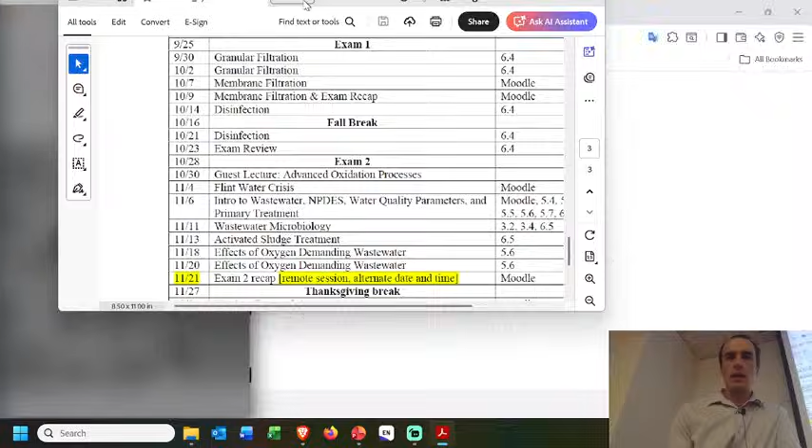So here's the attendance. I wanted to remind everybody the exam time. Location will be here like normal. Exam will be on Wednesday. Okay, I'm recording that just in case we have some stream issues. Like I mentioned, we're going to do a partially cumulative exam.

As I was thinking about it, in beginning to prepare the exam, I realized that I don't really want to do the multiple choice true or false as the cumulative. I'll keep that portion strictly on the recent stuff. So in terms of solving problems, it's about 50% cumulative. In terms of knowing more topical things about, let's say, wastewater regulation, that part will be strictly on wastewater: regulation, treatment goals, BOD testing, removal modeling, nutrient removal. Those topics will be the true-false multiple choice, 100%.

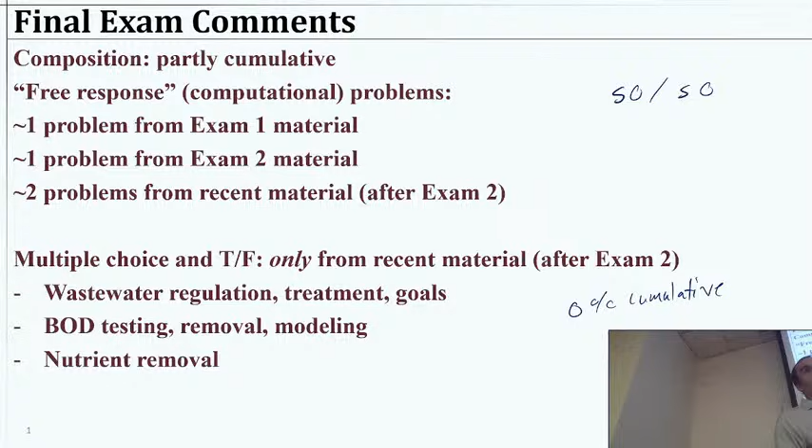And the remainder of the exam, which is probably 70 to 80% of the exam, will be 50%. So the free response problems, this is 50-50. And this part will be 100% not cumulative. So 0% cumulative. We'll say it that way. If that makes sense. I don't know if that's the right way to say it. A wastewater problem, because we also use sedimentation for wastewater. So maybe I would mix it up a little bit, but this is what you can expect in terms of

topics, the breakdown: 25% from the first exam, 25% from the second exam. And you'll find the nature of the course, it is quite cumulative. You've been doing mass balances from day one, and they're still relevant, right? Okay, so that's what you can expect. I don't have it quite finalized, but getting there. Any questions on that? All right. So we will get going with the homework solutions then. And as soon as we're done with that, if there are no other questions, we'll have you on your way.

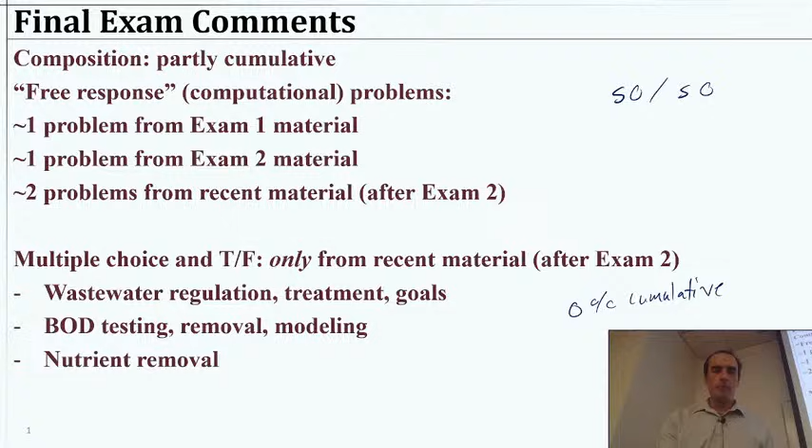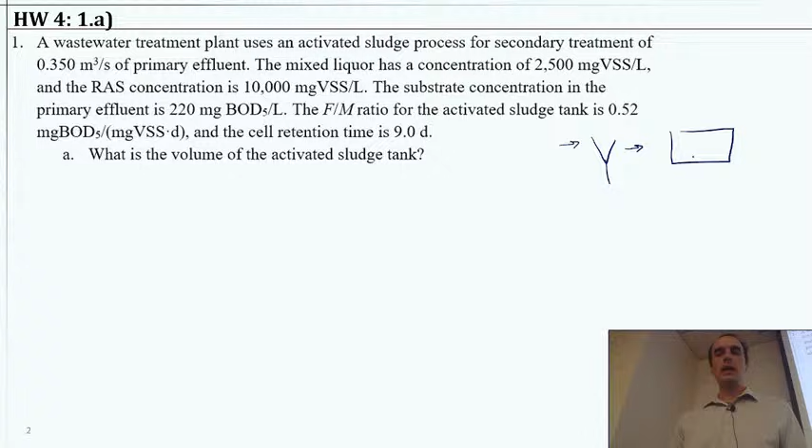So problem one, we have a wastewater treatment plant using activated sludge for secondary treatment, and we're given a flow rate of 0.35 cubic meters per second, primary effluent. So it might be good to go ahead and draw that up. Primary effluent would be what's leaving the first clarifier, the primary sedimentation, going into our activated sludge basin. Normally this will go into a second clarifier, and we might have recycle. But I'm going to just leave it right there for a moment and say that we have this flow rate leaving this guy, maybe an effluent from the primary. That is 0.35 cubic meters per second.

Okay, then we have the mixed liquor suspended solids concentration is 2,500 milligrams per liter VSS. That is going to be the X concentration within the reactor. It's going to be the mass concentration of bacteria in there. Then we have an RAS concentration. That would be our return activated sludge. That means we do have recycle. The XR here, go ahead and label that. So the X was 2,500 milligrams per liter VSS.

Okay, then we have the substrate concentration. Again, this is mentioning the primary effluent. So keep track, and this is what I like to do with drawing it, is keep track of what pieces are going where so we understand what we're talking about. So primary effluent, this is the primary treatment. The effluent to that is what's leaving it. So we have an S here, we'll call it S naught. That is 220 milligrams BOD per liter.

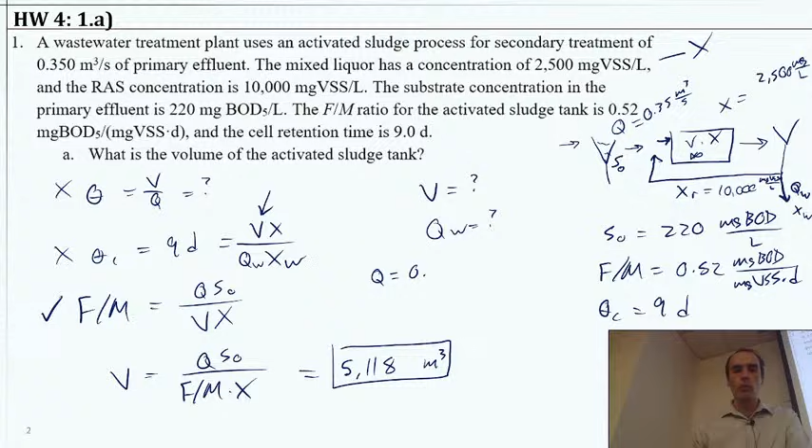Will you convert the Q into meters cubed per day? Yes. And I'm not sure if actually I did. I had that written on my notes, so I didn't find the answer, but we would say Q was 0.35 cubic meters per second. Of course, we have to count exactly like you said to convert it to days. So that would be 86,400 seconds in a day.

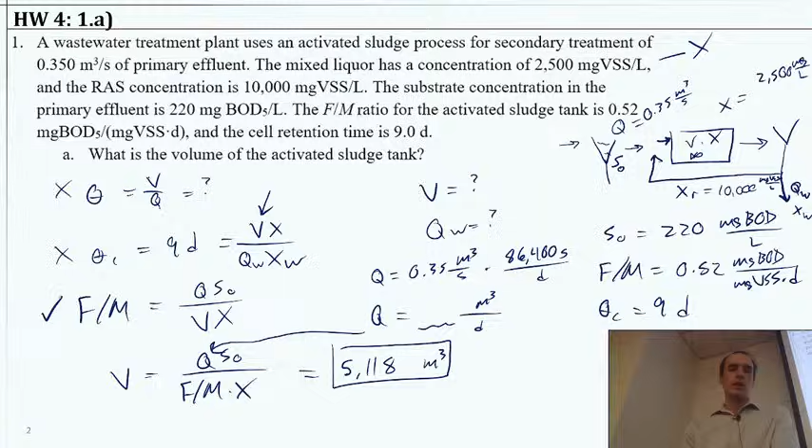Okay, so part B asks what is the waste activated sludge flow rate? So how much are we wasting per time? Here's where we need our QW. And if we flip back a second, we kind of wrote down all the possible equations we might want to use. And theta C would make use of that, but we needed volume, right? We didn't know QW, but now we can solve it because we have the volume. So we can rewrite that equation. Theta C is Vx over QW XW. We recognize that we can simply swap the QW with the theta C.

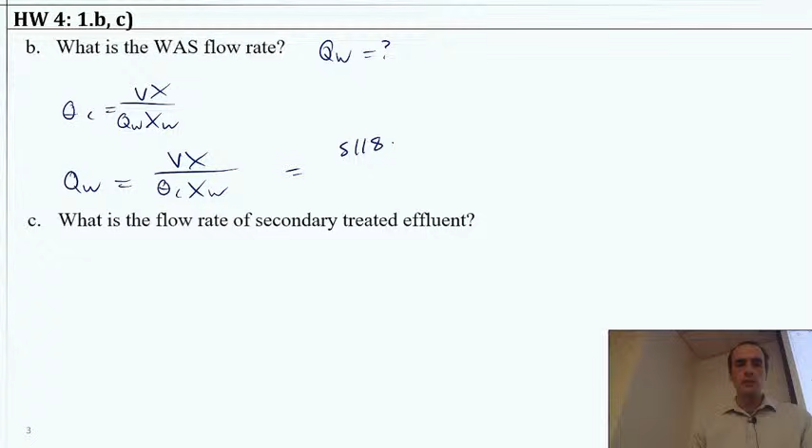And again, we need the theta in days, so that QW will be in days. When we put in the numbers here, this should become that 5,118 cubic meters, times the X, which was given at 2,500 milligrams VSS per liter. All this divided by the 9 days times our XW, which is equal to the XR. That was also given at 10,000 milligrams VSS per liter. Okay, putting all that in, this should give us a QW of 142.2 cubic meters per day.

Okay, so pretty straightforward there, as long as we have our units set up correctly. Part C asks, what is the flow rate of the secondary treated effluent? So again, we might want to be looking at our overall system design, where we have our reactor, our recycle, the QW is here, and we could say this is the Q effluent. And here, all we need to do is a balance on the Q, because we have Q effluent from the primary coming in. That was given.

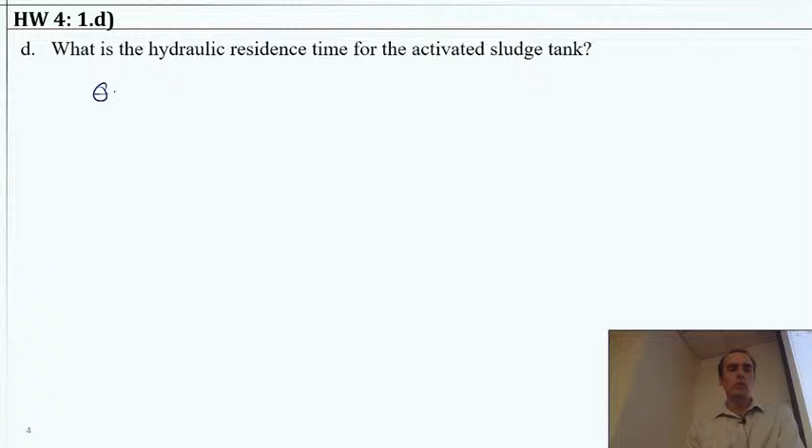Part D asks, what is the hydraulic residence time? This will simply be V over Q now that we have the volume and we know the flow rate. But again, the important thing is to take a look at our control volume. We make an important assumption in this type of problem that none of the volume of our clarifier matters for the reaction. So we're not bubbling air through it. The water's not staying there for a terribly long time. And so we make an assumption that the volume there doesn't matter, doesn't add to our system, and therefore we can draw our control boundary beyond it and ignore the recycling flow rate.

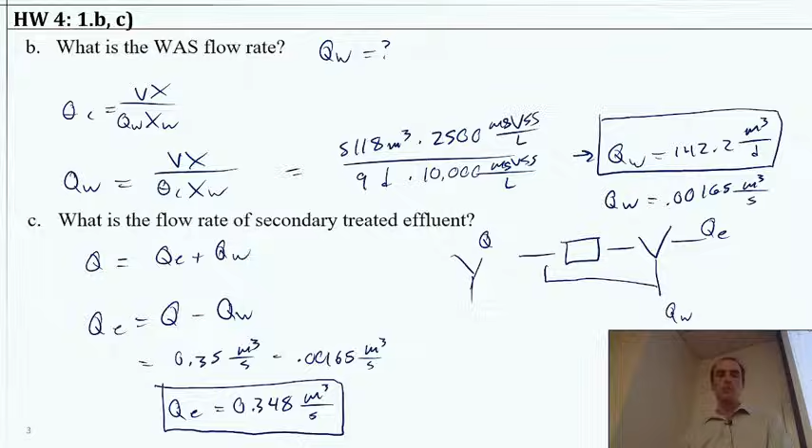So the total flow that's going through the reactor that does biological treatment is the Q that's coming across this control boundary. Okay? So that's going to be our Q, and the only volume that's important is going to be the volume in that tank. So this would then just be the 5,118 cubic meters divided by our 0.35 cubic meters per second. That's 14,000 seconds and some more, or 0.169 days. Good on that.

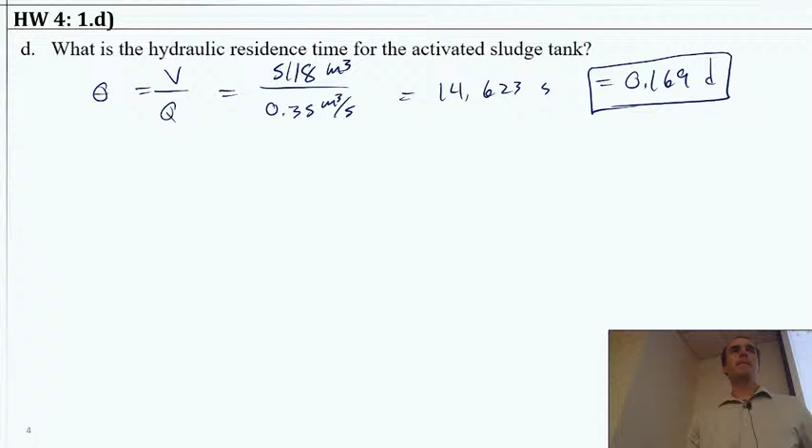All right, problem 2. We have some incoming wastewater with a BOD equal to 200 milligrams per liter. It's treated in a well-run secondary treatment plant that removes 90% of the BOD. You are tasked to run a 5-day BOD test with a standard 300 milliliter bottle using a mixture of treated sewage and dilution water, no seed, because not needed. And we're going to assume the initial DO is 9.2 milligrams per liter. So part A says, roughly what maximum volume of treated wastewater should be put in the bottle if you want to have at least 2 milligrams per liter of dissolved oxygen at the end of the test? You're filling the rest of the bottle with the water. You're filling it completely, and you need some amount of wastewater in it, right? So what's the maximum volume of treated wastewater that you would put in it?

Now the trick here, or the thing to note here, is treated is highlighted. So it has already passed through the treatment, and we know something about that treatment, right? It removes 90% of the BOD. So the initial is 200 milligrams per liter of BOD. That means the S in the effluent, or the treated, should be 10% of that, right? So this should be 20 milligrams per liter of BOD. That means what we're putting in our bottle is 20.

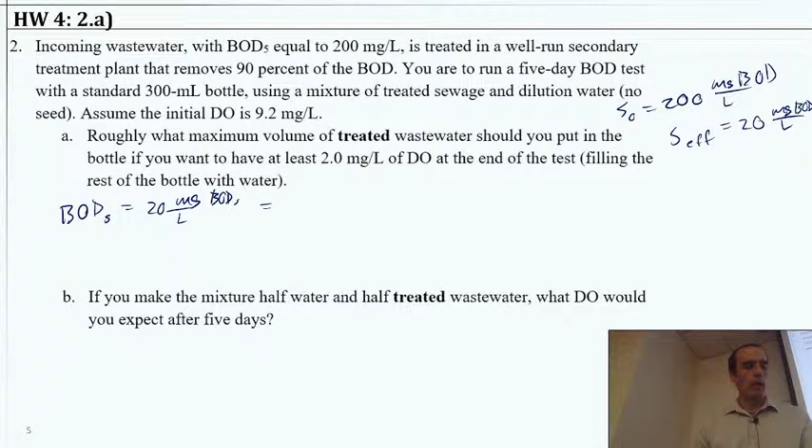So when we set up our BOD equation, we would say that is 20 milligrams per liter. And we can say that's going to be equal to the dissolved oxygen initial minus the final divided by the dilution coefficient. And the dilution coefficient is where we're going to find the answer, right? Because that is the volume of the wastewater divided by the total, which is 300 milliliters. Okay, so that's our problem set up. Now we just need to put in the different pieces and solve for that volume of the wastewater. In fact, I'm going to go ahead and multiply both sides by the P here. So we get volume of the wastewater that we want to solve for divided by 300 milliliters. I'll go ahead and leave the 20 milligrams per liter here for a moment.

And that's going to be equal to the dissolved oxygen initial, which was given as 9.2 milligrams per liter, minus the final amount that we needed, which was 2 milligrams per liter at the minimum. So now we have our system. All we have to do is take that on the right side, that'll become 7.2. Divide that by 20, multiply it by 300.

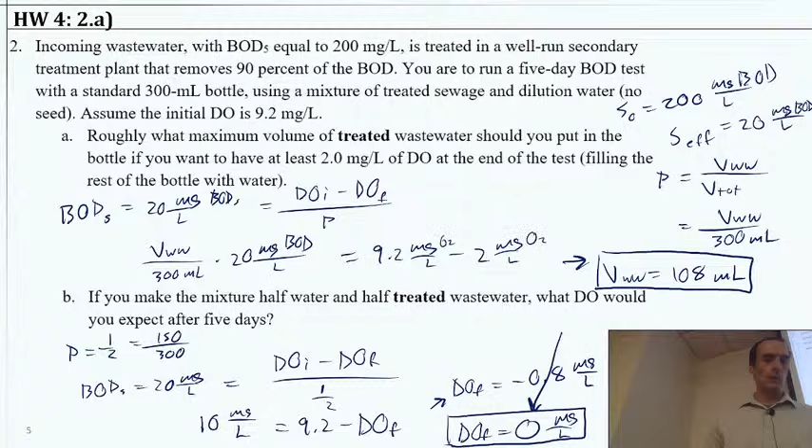Okay, moving along. So problem 3, we have a BOD test that's run using 100 milliliters of treated wastewater mixed with 200 milliliters of pure water. The initial dissolved oxygen of the mix is 9 milligrams per liter. After 5 days, the dissolved oxygen is 3 milligrams per liter. And after a long period of time, the DO is found all the way down to 2 milligrams per liter. So what we know already is we have a 5-day BOD test and then a very long BOD test.

So we're given some information about a longer period of time where BOD is processed. And it no longer seems to be dropping. So that essentially gives us the ultimate BOD, the amount that will be consumed if we give it as long as it could ever want. Assume nitrification has been inhibited, so only BOD measured is carbonaceous. Okay, so what is the 5-day BOD of the wastewater? That kind of brings us back to the same type of thing we were just doing.

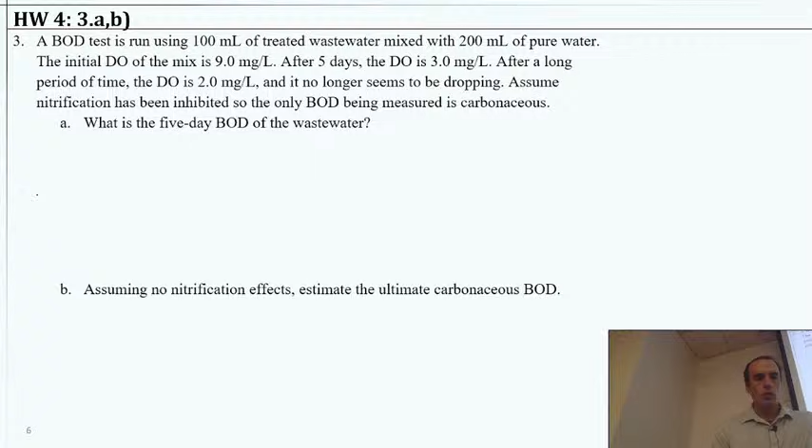Very simply, we have BOD5, DO initial minus DO final, divided by the dilution factor. This is simply going to be the 9 minus 3, and we were given 100 out of 300, so this will be 1/3 here. So 9 minus 3 is 6, times 3 would be 18. This is going to give us 18 milligrams BOD5 per liter.

All right. So part B says, assuming none of that nitrification stuff, estimate the ultimate carbonaceous BOD. So the ultimate, that is our L naught, or it's also called the BOD at an infinite amount of time, or at least a sufficient amount of time where it's no longer any oxygen demand. Right, so maybe that's 20 days or 2 months or something, but it's enough time where the oxygen is no longer changing from these processes.

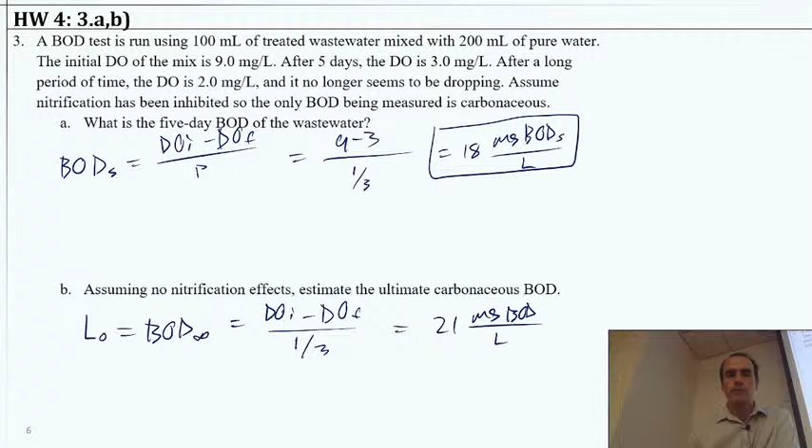So we can say that would simply be the same process here, DO initial minus the DO final divided by the 1/3. This is going to give us 9 minus 2 is 7 times 3 should be 21 milligrams BOD per liter. So DO initial was still 9, and this one was measured at 2 after a long time. Okay, does that make sense?

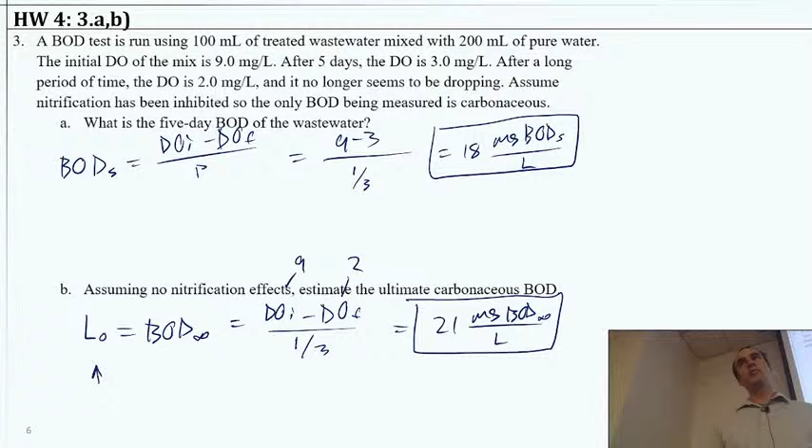All right, so this is how we're connecting the BOD tests to this modeling stuff, because you'll recall that this parameter began to be important in terms of understanding if we discharge something downstream, what's going to happen. That's where we got the fancier formulas involved. So that's where we're going with part C and so on.

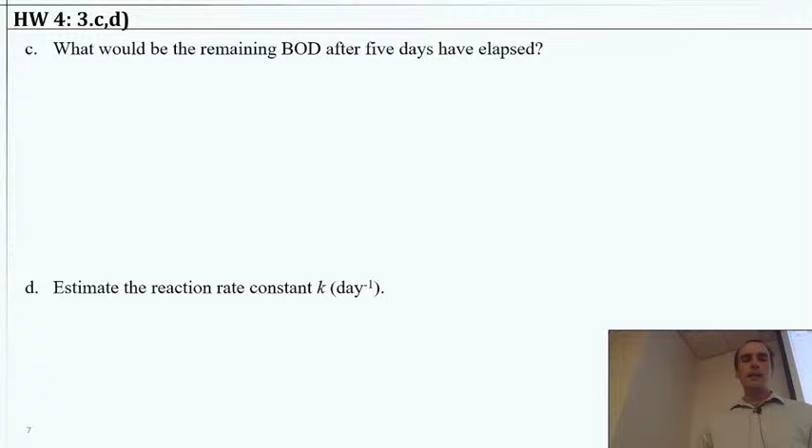C says, what would be the remaining BOD after 5 days had elapsed? Well, this one's a little simpler. So the amount remaining at some time t, we call this Lt. This would simply be the ultimate amount minus the amount that has already been demanded. So this is going to be 21 minus 18. Because we just solved these two numbers, right? So after 5 days has elapsed, we have 3 milligrams per liter of BOD remaining.

Then part D says we want to estimate the reaction rate constant, K, per day. So this is referring to the reaction rate of BOD removal from the system. If we model the BOD removal, BOD at some time t, we can describe it as L naught times 1 minus e to the negative kt. And we need to find that k.

And if you remember, we mentioned in class, this is similar to the deoxygenation rate constant, but not always exactly. So we're just going to call this the BOD reaction rate constant. So we actually know the t. If we set that at 5 days, we know something about the BOD at time t, and we need to know something about L naught we were given, and then we can put the pieces together and solve the problem.

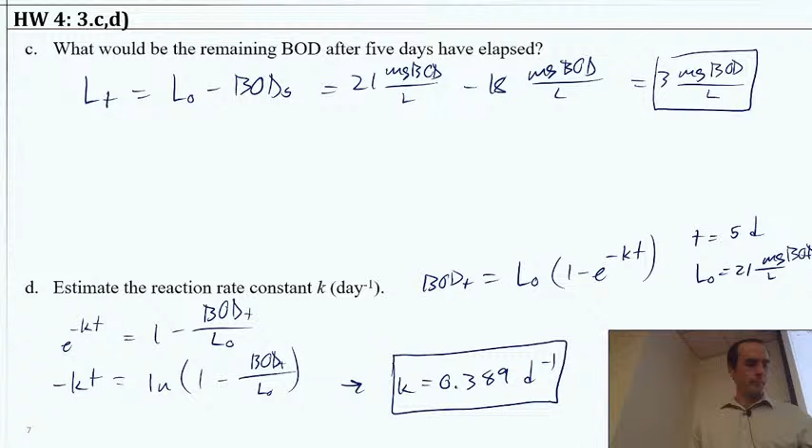So problem 4, this one's from our book, says suppose the only source of BOD in a river is untreated wastes that are being discharged from a food processing plant. The resulting oxygen sag curve has a minimum value of dissolved oxygen somewhere downstream equal to 3 milligrams per liter. So if we take a look, oxygen dips all the way down and reaches 3 milligrams per liter somewhere downstream. Just below the discharge point, the DO of the stream is equal to the saturation value of 10 milligrams per liter.

Part A says, by what percent should the BOD of the wastes be reduced to assure a healthy stream of at least 5 milligrams per liter of dissolved oxygen everywhere? And then the question adds to that, would a primary treatment plant be sufficient to achieve this reduction? So we want to essentially move this minimum up to a value of 5. So if 5 is kind of the halfway mark, we need it to somewhere around there. And a new sag curve would look something like that.

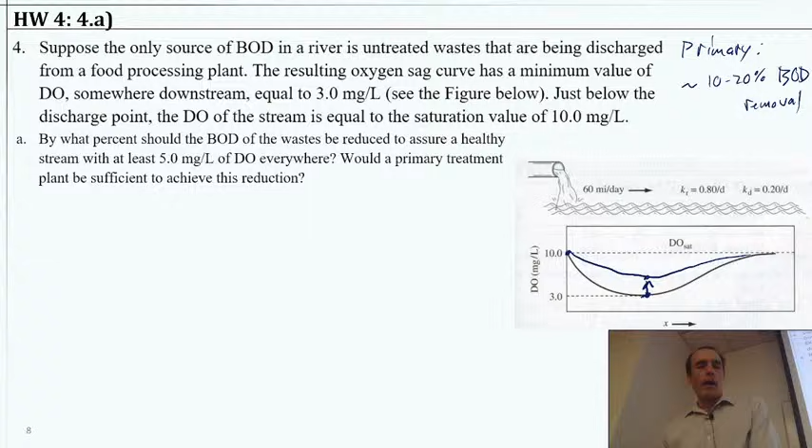The question is, is a primary treatment plant sufficient? And we could take a look. Primary treatment plants might remove 10 to 20% of BOD. They're not super effective, but it's certainly something. And maybe I should look that up, or maybe you can Google that for me to get what AI thinks it is. But I think it's something like that. So we'll keep that in mind, unless you correct me. What I should do is go back and look at the book and remind myself what the book says about it. Anyhow, the secondary treatment is what we usually use to remove the bulk of it. So that'll be more like 90 to 95%.

So coming back to the primary part of the question, however, what does it take to go from 3 to 5? So we need to know a few things. One, we probably need to know, where does this DO minimum occur? So where in time and in location is that, X critical? That will correspond to some critical time, and then we can evaluate from there. Although that would be what we need in order to solve.

Sorry, I was looking at my notes. We might need that for our time in our equations, but actually, if we look at those equations for a moment, because this would give us the time critical, right? But I think we don't need that just yet. Because if we look at our equation, the deficit, and this is what we want to go from a deficit of 7 to a deficit of 5. This has a function, and by the way, we're also given a few parameters here. This function looks like KD L naught divided by KR minus KD. A quick check looks like KR is not equal to KD, so we're fine to use this one.

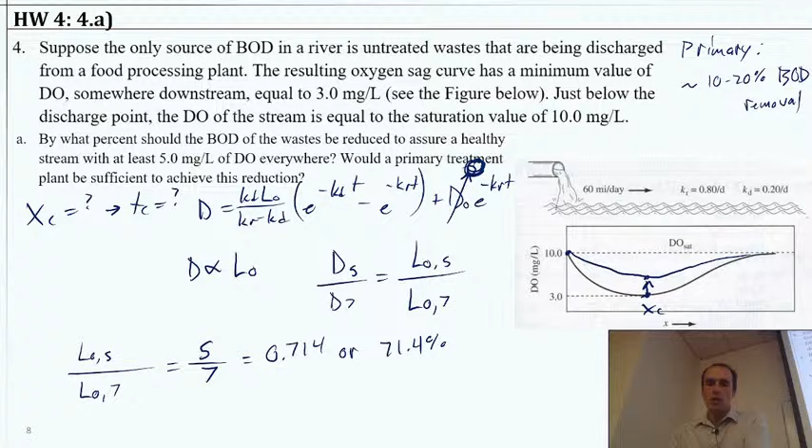Okay, we have a question. Does the initial deficit cancel because it is assumed to be at the saturation, like right before the discharge? Yeah, the portion on the right, the initial deficit, the right-hand part of the equation, goes away because it's multiplying by a 0, because there is 0 deficit when we start off. Now, if you're referring to the L naught here, we are actually just relating the deficit to the L naught. But I think the first part was your question.

All right. So we have this 71.4% removal, or excuse me, that's remaining. That's the value that would be remaining in the water that achieves the 5 milligram per liter DO deficit instead of the 7 milligram per liter deficit. So then, in terms of removal, we could take 1 minus that and get 0.286, or 28.6% removal is needed.

So I guess it depends a little bit on how efficient the primary treatment is, how much BOD it's going to remove. My guess is it would not be enough. Is the primary treatment enough? It might be close. Anybody look up a typical number for me? No? Okay. Well, let me know if you do. Any questions on that? Does that make sense?

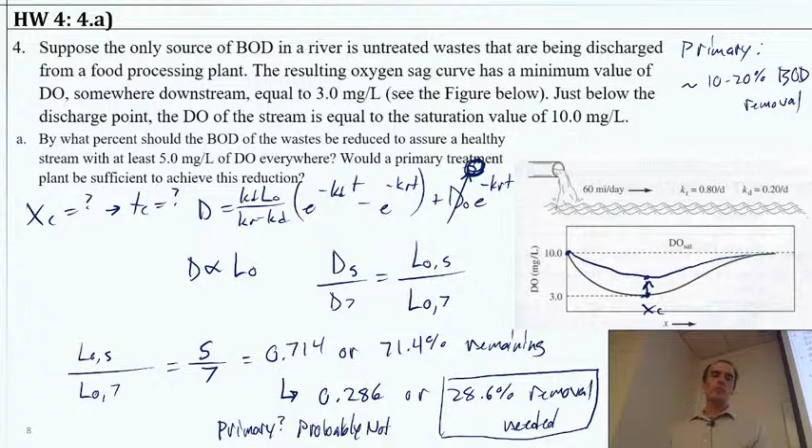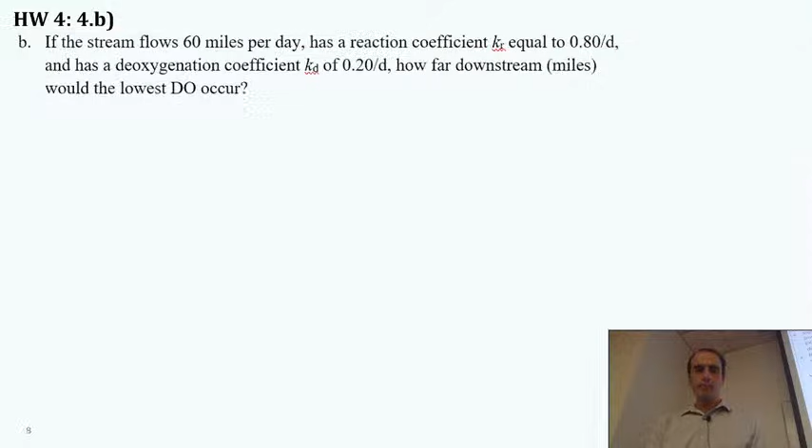Okay, so this one is a little odd because you could move forward and find the time and then come back here and put it in. What you'll find is even if you solve the time for 2 different deficits, it's the same time. You'll get the same parameter with the next equation, which we get to in part B. So I'll highlight that in just a second. But ultimately, you could solve it moving ahead, solving the time, and then coming back and putting the time in there for a calculation with one deficit, and then compare that with the other deficit. It'll all fall out and simplify just like this. Okay, and it would not be a problem if you did do that. It's just a matter of the way the problem is structured kind of shows you maybe you don't have to go that far just yet.

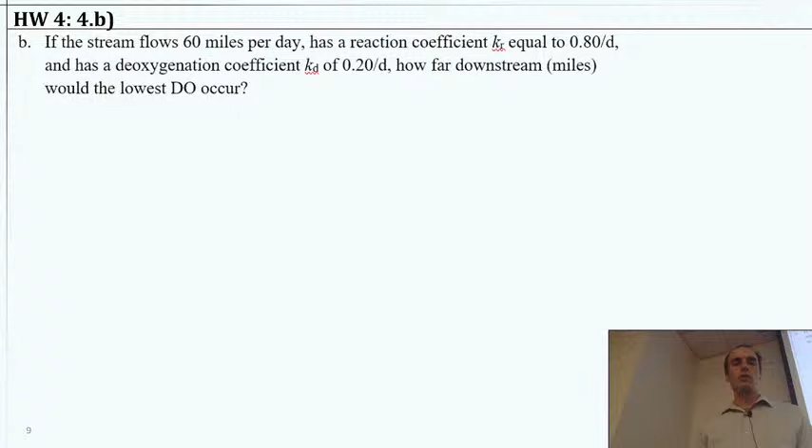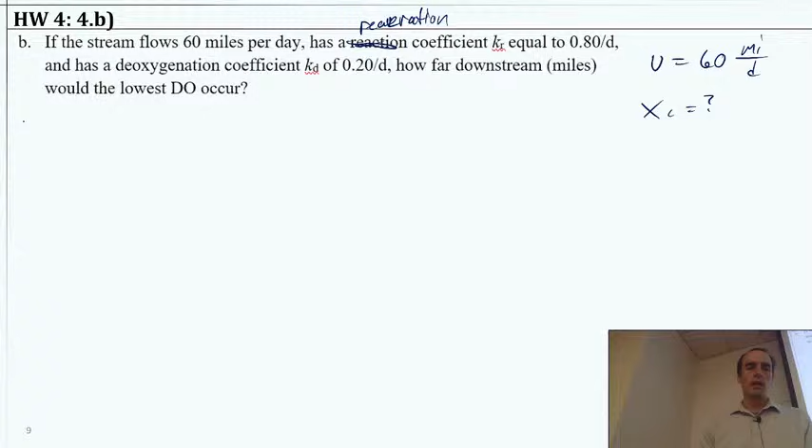So problem B says if the stream flows 60 miles per day, that's our velocity, we're going to call that U, and has a reaeration coefficient Kr equal to 0.8 per day, and a deoxygenation coefficient Kd of 0.2 per day. How far downstream in miles would the lowest DO occur? Okay, so here we again are wanting to find XC that'll give us a critical time, which we could have used in the previous problem, as I mentioned. So we have an equation to find TC, which I guess we can go either way, right? We can go backwards because XC, the distance, would be the velocity times time, right? U times TC.

Our equation for TC is 1 over Kr minus Kd times the natural log of Kr over Kd times 1 minus the initial deficit, which is 0, so this is going to cancel. So this whole thing will become a bit simpler: Kr minus Kd divided by Kd times L naught.

What you'll notice here is when we have no initial deficit, the L naught does not matter in the time equation. If we did have some initial deficit, then this might matter, and my approach in part A would not work. So maybe we ought to have looked at this equation before coming to that conclusion. But given this entire part of the equation, we can ignore it, right? So then our time is only going to depend on Kr and Kd, just those.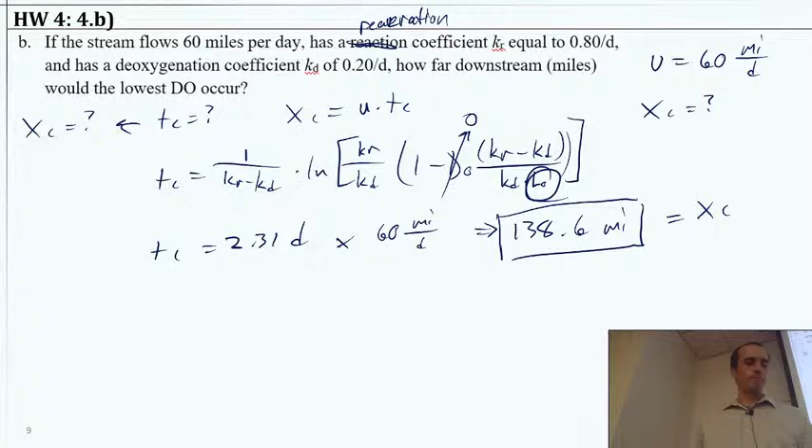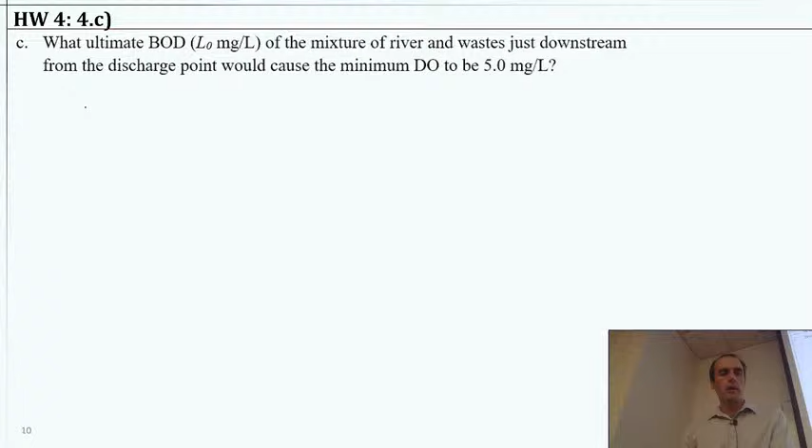All right, part C says, what is the ultimate BOD, L naught, of the mixture of the river and waste just downstream of the discharge point that would cause a minimum DO of 5 milligrams per liter? So that's kind of coming back to the initial portion. We now want to calculate that value. So if our deficit that we're going to find is 5 milligrams per liter, we can simply use that deficit equation and set that equal to this equation and solve for L naught.

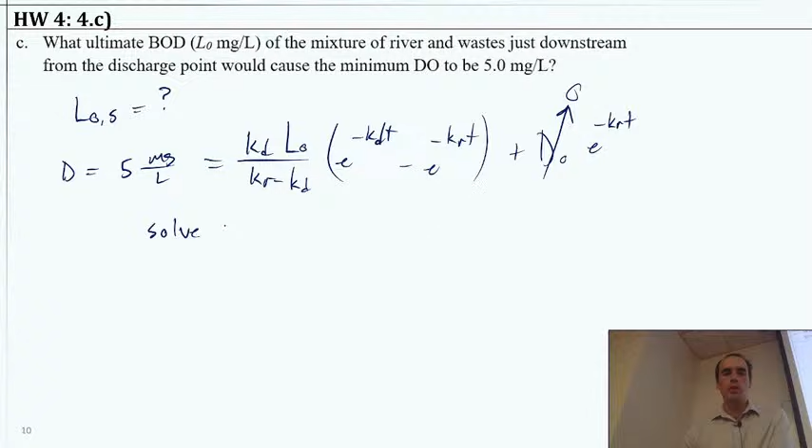So this would be Kd times L naught. We're going to solve for L naught here. Divide by Kr minus Kd times e to the minus Kdt minus e to the negative Krt. All of that plus the initial deficit times e to the minus Krt. Again, that guy going to 0. So if we rearrange and solve, put in the numbers and solve for L naught, it's just a little bit of algebra and calculator work. We should get an L naught of 31.75 milligrams BOD per liter.

Okay, so for the wastewater treatment plant, if we think about it, how much damage are we doing to the ecosystem? How much oxygen are we depriving the ecosystem of? If we are okay taking away half of the oxygen at the worst scenario, so going from 10 down to 5, then we can actually discharge almost 32 milligrams BOD per liter. So if you left that in a jar, it's going to completely deprive it of oxygen, and that would be bad. But given that the stream has some mixing and everything, we see that it has some capacity to take some waste. Any questions there?

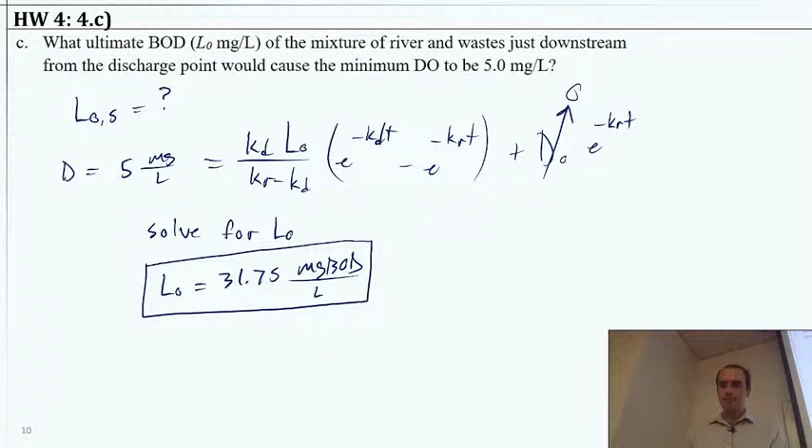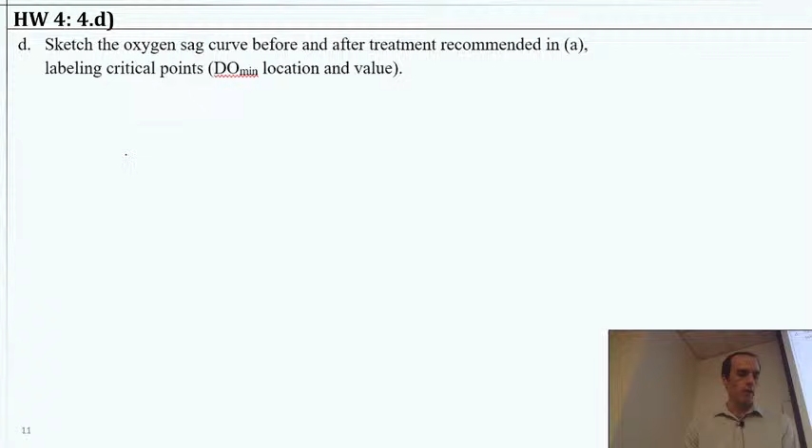Right, so part D, last little bit, says sketch the oxygen sag curve before and after the treatment recommended in part A, labeling critical points, DO minimum, and the location and value. So we kind of already did this a little bit on our initial graph, but we'll go ahead and do it again. If this is our dissolved oxygen on the axis, this is 10 milligrams per liter, 5, and 0. We have some critical time. This was the 2.31 days.

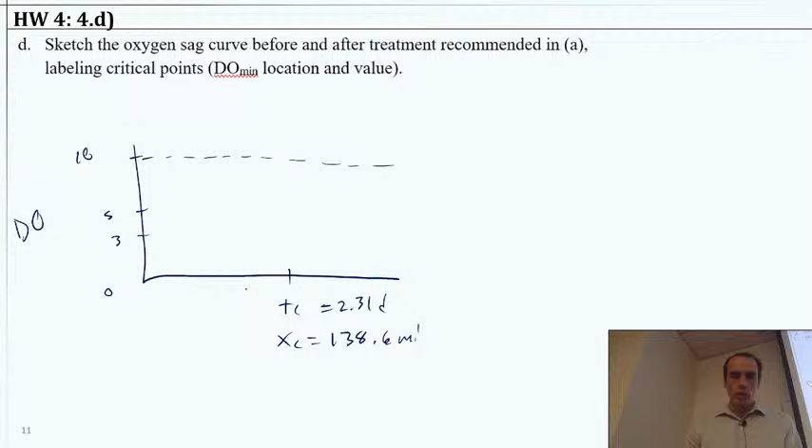So also, we could put distance on the x-axis if we wanted to. That came out to be 138.6 miles. So if you think about that, that's pretty far downstream, right? That's quite a ways. All right, and up here, this is our oxygen saturation value.

And so we could draw one curve. Let's do this. One curve that reaches down to 5 and comes back up. And the other, the dirtier water, we'll color here. It comes down and reaches about 3 before coming back up. Okay, not my best drawing, but you get the picture. All right, so that would be the homework. Any questions?